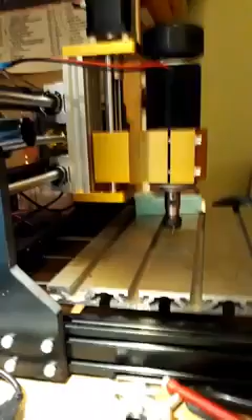Okay, let me see here. I'm trying, just a second. Okay, now, let me see here. Let me turn you guys around. Whoa, there we go. There we go. There we go. Let me see. I'm trying to get you guys in a good place where you can see what I am talking about. And okay, that should help.

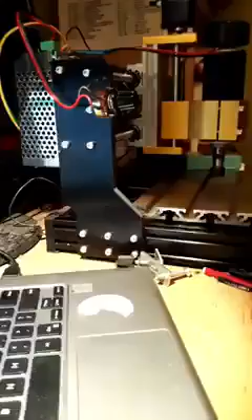Alright, this is an upgraded 3018, and I have just got it plugged in and working, except my Z-axis quit working. But I'm going to show you how to do some troubleshooting. Okay? First of all, the 3018. One thing people have to understand with the 3018: the 3018 is not, and I repeat, is not an industrial machine. In other words, this is a toy, hobby, home CNC machine.

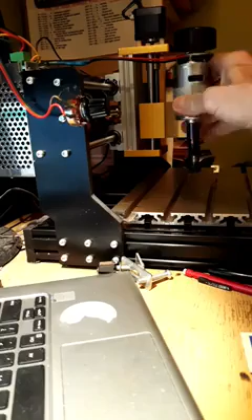Okay? With that being said, on the 3018 it is not recommended to run any tools larger than 1/8 inch. Now, why do they say that? Well, I'm going to tell you why, as you figured I would. You see that spindle motor there, right? Well, this here is your standard spindle motor. Okay? This little piece of crap costs $4 retail. There are no bearings in here. There are only bushings. Okay?

So, if you run a tool bigger than 1/8 inch, you are putting a heck of a lot of pressure on this stupid little motor. Okay? You will burn it out. You will burn the brass bushings right out of it. These motors, if you do not run them carefully, they will last you a month, basically. Okay? So, enough said about this little motor here.

What I highly suggest everybody does is take this motor and throw it in the garbage and get yourself the Genmitsu 775. It is a direct drop-in replacement. And what I highly recommend then is to get Mark's RPM control. Okay?

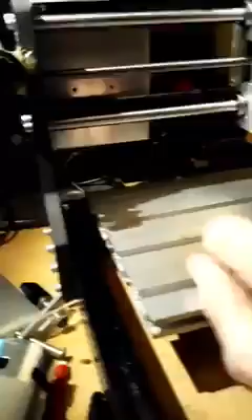Okay, let's get down to some terminology. First of all, because there's a lot of new people on here, very, very new people that just put their machines together last night, we are going to do this for them. First of all, you've got to know the name of the things on your machine. This is not called a thingamajig. This is not called a doohickey. This is not called a whatchamacallit. Everything on your machine has a specific name, and in my group, I require that people use the correct names of things.

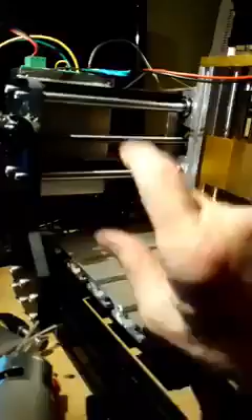First of all, these rods, these polished rods, they're 10 millimeter rods, and they are what your table slides on and what your X-axis slides on. Remember always, this is your Y-axis, this is your X-axis. They are always in that order: X, Y, and Z. Okay? X, Y, and Z. Now these are called ways. This is what the table rides on, slides on, and your X-axis slides on. They are called ways, W-A-Y-S.

Then you have your lead screw. Now your lead screw, obviously, is what moves your axis back and forth, okay?

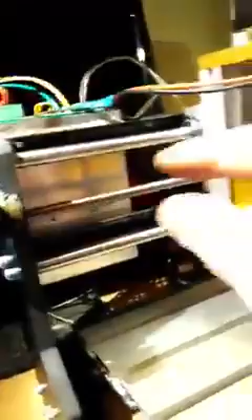Now, on the back here, you have a lead screw follower nut. It's spring loaded. When people ask me, what is that, why is it spring loaded with that second nut on there? That is what they call an anti-backlash nut. Now if you take a screw and you hold a big nut, and you hold that nut steady and you screw that screw, you're going to feel it going in. Then you stop and turn it backwards. You'll notice you'll be able to turn it backwards a little bit before it even catches. That is backlash. So we don't want that slop in this lead screw. That's why we use an anti-backlash nut back in here and underneath your table, in conjunction with your follower nut.

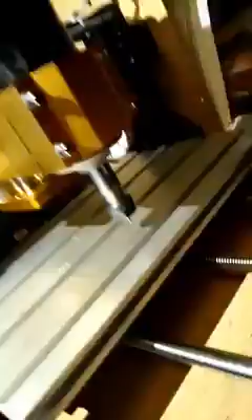These here are called collars. This is your collar between your lead screw and your stepper motor, and you have three of them. You'll have one on the back of your table back here, one right up in here, and one right there. One for each axis.

Now, one thing a lot of people don't realize is just the name of the machine itself. 3018 — where did they drop that thing out from outer space? Very simple, guess what? Because the capabilities of this machine, it can carve 30 centimeters by 18 centimeters. That's right, 30 centimeters here and 18 centimeters that way. So that's why it's called a 3018. People that have a 6550 laser machine, guess what? That machine can laser engrave 65 centimeters by 50 centimeters. So the name of the machine is the actual size of your carving area.

Okay, so I think we're done for tonight. Not really, not really. We haven't even started. I'm going to tell you a couple things that you have to beware of. And this is no joke at all. People that are watching here can verify this, and they will tell you in a heartbeat.

I'm going to do a little explaining about CNC and the stepper motors and such. Okay? First of all, what does CNC mean? CNC stands for Computer Numeric Control. In other words, that's all you're sending from your laptop. You're going to be sending G-code, which are just numbers, and it controls how everything moves. Okay?

Stepper motors. Stepper motors use a lot of power. Okay? A lot of amperage there. Now, these stepper motors move by just on-off pulses. The pulse, if you look at it on a screen, it'll look like this. Up, up, down, like that. Pulses. On-off pulses. With that being said, in the electronics world, you have something called induction.

In other words, very simply put, these wires that go to this stepper motor, you have really high amperage signals going through these wires, and they are going on and off, on and off, on and off. So, guess what? Those wires there are exactly like an antenna. They are just like an antenna.

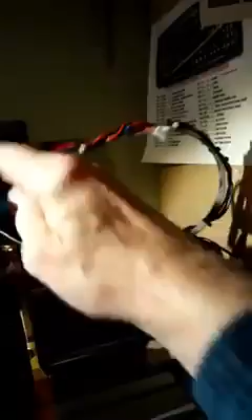And guess what? If your signal cable, the cable that goes from your computer over to your machine, is laying very close to stepper motor wires that are back there, and if you don't have your wires put up on a wire harness, they will get caught and you will tear them out and you will be in trouble. Be careful with your wires. I will show you how to make that.

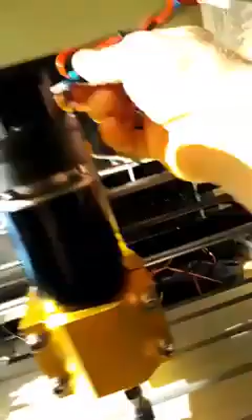It's really, really simple. I'm not even finished with mine because I have to reattach it here, I haven't gotten that far yet. But that's how it is when it's attached. Okay? Now, that keeps my wires away from everything else. They can't get hung up on anything. And the wires are away from my signal cable that is plugged in the board. Back here, the signal cable goes over to my computer, okay? It is totally away from those stepper motor wires.

Because if you don't do that, you'll be in the middle of a project, and I can guarantee you it will happen in the middle of a project. Not in the beginning. It'll either happen right towards the end or right in the middle. What happens is, as you're sending your G-code from your computer to your machine, that cable is laying next to stepper motor cables. And those stepper motor cables are just pushing out bad noise. It's called electrical noise.

And it's pushing it right into your signal cable, and that G-code that's going from your computer into your machine, guess what? It gets garbled, and all of a sudden your machine does not recognize it. It might move. It might jump from one letter and keep printing the letter a half an inch further away. You can get all kinds of weird problems. Or it just might lock up and say, sorry, we had a problem. Okay? That is a very well-known problem in this world.

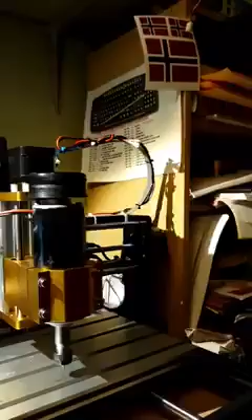And guess what? Those high frequency vibrations are exactly like an Allen wrench. They'll loosen up every screw you have in your machine. And if you think I'm joking, then just forget what I'm telling you. I have literally seen these machines fall apart. I mean, hanging. The whole thing had fallen apart. Because the person that put the machine together did not use, let me go get it here. This is where I just put all my stuff together.

And what I recommend people use when they are building their machines is, just a second, I'm trying to find, here we go. There we go. Sorry. This right here, Loctite. It is called blue. This is blue, not red. Blue Loctite. And this number right here, 243.

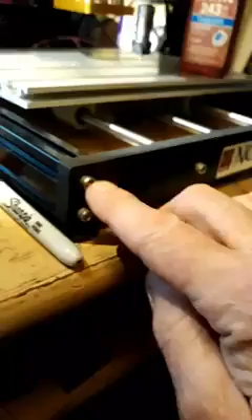If you use red Loctite on your screws, you will never get them out again. I'll repeat. If you use red Loctite on your screws, you will never get them out again. And if you have a problem with your machine and you need to take it apart, you are screwed. Okay? Blue 243 Loctite. And what you do is very simple. You start right here and you take this screw out. You put one drop of that blue Loctite on it.

You put it in and snug it up. Tighten it up. Don't over tighten it. You don't want to strip the threads. Just snug it up, just a little bit, just tight.

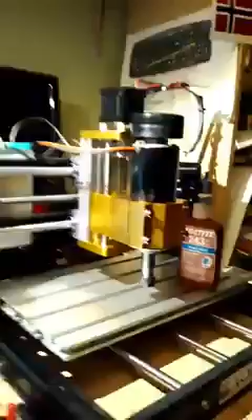When you're done with that one, you go to that one, and that one and that one. Every single screw. I'm talking every screw. Every screw that you can find on your machine, you need to put Loctite on. Okay? So that will keep your machine from falling apart.

Okay. Now, these machines are very, very simple. They're very, very simple. You have a controller board, and all that controller board does is control the hardware on this machine. And it's really simple hardware.

Basically, we have 3 stepper motors. One here, the X, you have Y in the back, and you have Z up here. That's all we have, 3 stepper motors. With that being said, there is no more movement. Your table moves forward and backwards, your X-axis moves left and right, and your Z-axis moves up and down.

So there is not much that you have to worry about with a machine, and troubleshooting is a breeze. The only thing you have to do, if you are going to troubleshoot something, is look at what the problem is and think logically. That's the whole trick right there. The whole trick is being able to think logically when you have a problem.

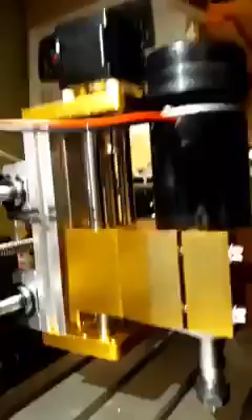That's your communications. And it's lighting up because it is getting 5 volts from the USB. Those 5 volts are what is lighting up the board right now. When I plug my power plug back in, there's going to be another light that comes on back there. So just because you see red lights back there does not mean that it's plugged in.

Now you don't have to unplug your signal cable if you're going to mess around with your machine electrically. So right now, I'm going to pull this connector out of my X-axis. I just pulled the connector out. This is what I just pulled out from the Z-axis. And I just go right in here and plug my Z-axis into my X.

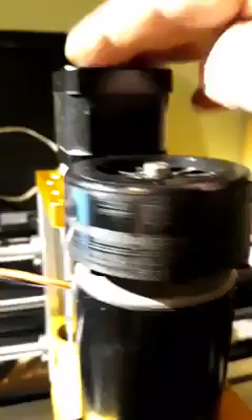Now watch this. I'm going to plug in my machine. Now, my Z-axis up and down should be controlling this X motor. So now I'm going to try to find out, is there a problem with my wiring, or is there a problem with my stepper motor? I have a feeling that it's a problem with the stepper motor, but I need to check my wiring.

So I unplugged the X. Here's the plug over here for the X-axis, and I plugged my Z-axis into it. Now, let's see if it moves. Nope. Right now, it is not moving my X-axis at all. I'm going to turn this plug around. Let's see. Then try it again. Oh, it tries to, but it's not working.

Okay, so now I have found out that there is a problem coming from my wire, from my board. So now I'm going to plug my X-axis back in. I just plugged that in and pushed my power in. Now let's try. Oh, it's moving. So there's nothing wrong with my X-axis.

Now my X-axis is back to normal. I got that wire in there. So this is my problem, and it looks like I might have a problem on the board itself. Okay? So this is exactly how you do troubleshooting.

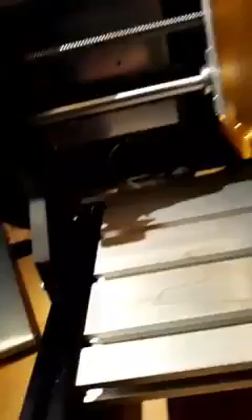Now I'm going to try one more here, and what I'm going to do is go back here and pull this wire off of my, and it won't reach. I was going to try my Y-axis on that stepper motor to see if it was working, but I can't. It's not long enough.

So I'm going to plug this all back in now, and I can move everything except my Z-axis. So I'm just going to try moving my X-axis now, and I'm going to move my Y-axis. Okay? See, everything's working fine. One thing you have to realize, any of these buttons, you have to realize one thing here.

These arrows mean move my spindle in this direction. Okay? If I click on this, it is going to move my spindle to the left. Okay? And that's what it's doing. Now, a lot of people think, oh, if I press this, the table is going to come forward. Wrong. You are not moving the table. You are moving your spindle.

So on this one here, you are telling it, I want to move my spindle forward, which, guess what? Moves the table backwards, okay? But you're bringing your spindle forward. That's what we wanted, right there. If I want to move my spindle towards the back, then I move it and the table comes forward. Okay? All magic.

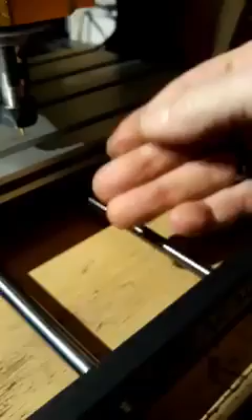Now, first of all, let me tell you a couple things here. Let me just move this back. Now, on your 3018, you see how clean this is? There's nothing on here, okay? That is because we do not put oil; the only thing that is recommended to put on this lead screw here is graphite. G-R-A-P-H-I-T-E. Graphite. It's a dry lubricant that you can put on here.

If you put oil on here, guess what happens when you're doing your carvings and all of that dust is falling right onto here and it sticks to the oil, and as it's going back and forth, your lead screw follower nut back in here will get caked up with sawdust. And guess what? It will get caked up like cement. And it will stop up and your machine will not run. Okay? And you will risk burning out your stepper motor or your board.

Do not put anything except graphite on this lead screw, or you are going to be asking for a lot of problems. Okay? And that's not cool at all. All right.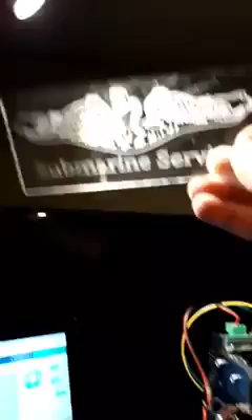And I mean, the things that you can carve with them, just like this here. Well, let me get a good picture of that. It's kind of hard to see. There we go. Put a little bit of light on it. This is done on plexiglass; actually, I just found it back on the floor, so it's all scraped up, but try to get it in focus. There we go. So you can do really cool carvings with the engraving tool.

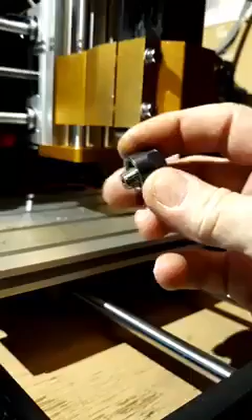Okay? And I'm going to talk a little bit about collets. If you've never used collets before, well, guess what? You've got to learn how those work too. When you take your collet, your nut, out of that machine, okay? You see this is your collet here. And you only get one with your machine. Okay? You only get one. And it's 1/8 inch, or 3.175 millimeters, which is the same thing.

Okay? Now these collets, if you take yours out and you tip it upside down like this, and if it falls out, you have been doing it wrong. Okay? These should not fall out. Now, I have to put you back up here. Just hold on for 1 second.

Okay, now I'm gonna show you these collets. When you're gonna take the collet out of the collet holder, what you have to do is you have to cock it. So you have to keep turning it, and you'll feel there, right there. It just clicked, and it is completely cocked.

Okay? Then, what I take, anything, a little piece of wood, but let me just give you some light on this. Okay, you see how it's cocked right there? And all I do is take a piece of wood or pencil or whatever, and I push. And there we go. It just came out.

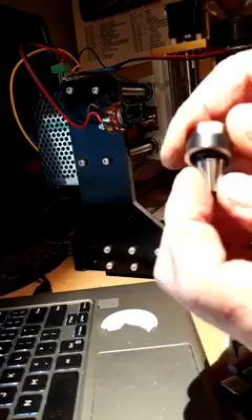Now you see this ridge here, inside of here, there is a ridge in there. And that's why when you put a collet inside the holder, what you do is you press it, you just press it until it clicks. And then you hold it upside down and if it doesn't fall out, it's correct.

Now, I'm going to talk a little bit about collets. A collet, you see all these grooves? You know what these grooves are for? It's because this here is tapered. This is tapered. And the inside of the shaft on the motor is also tapered.

So as that nut pushes that collet up, okay, that nut will push that collet up, and what it does is it closes. It closes all of these veins. It tightens up around the tool. All right, supposedly, okay?

Now, if you do a carving and you're going to change tool, let's say you're going to use a 2-tool project with a roughing tool, and you're going to use a 1/8 inch tool, and you're going to hog out all that wood. Then you're going to put a detail tool in there. Whenever you change tools on your machine, take your collet out and clean it.

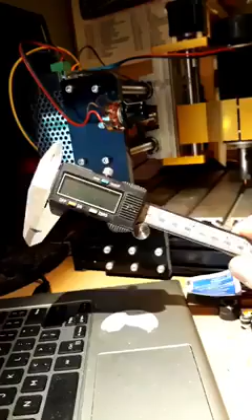Now, I tell everybody in my group, every number that you put in Easel should be 100% correct and dead on. If it is 3.1 millimeters, then that's exactly what you should put in. And with that being said, you cannot own a CNC machine without owning a set of calipers. These calipers are every CNC operator's best friend, because everything you want to do, you want it to be 100% accurate.

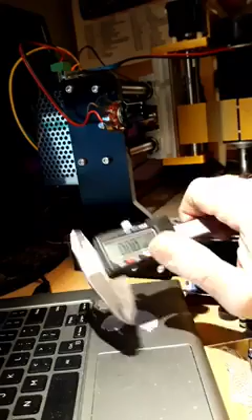Okay? And what I mean by that is I want you to measure exactly everything you do on your machine. Okay? And my batteries are getting low, I can see. So, use a set of calipers.

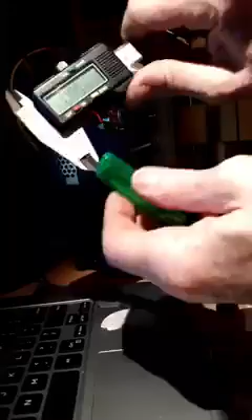Now I'm going to show you real quick. Calipers, this here is for outside measurements. I want to see the size of this lighter, I can measure it like this. Now, if somebody was to say, well, Paul, how big is that hole right there? In this game here, we do not eyeball anything. You don't go like this and eyeball it. No. You use the inside. You see that there? This is for inside measurements.

So what I do there, watch this. I put my calipers in there and I pull them out and I can say right there, it is 19 millimeters. Exactly a 19 millimeter hole right there. That is your inside.

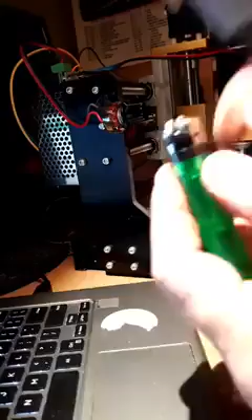Then if somebody was to say, well, how deep is this? If I put this on the table, how high is it from here to the table? What's the height of this? Well, if I just do this, oh, let me just hold on to this for a second till I get it.

There. That is your depth gauge. Your depth gauge, and that is 31.5 millimeters. So you just put the edge on here like this and you push down. There we go. Just like that. 31.5 millimeters. Okay? So now you know how to use calipers.

If you are going to own a 3018 or a CNC machine, excuse me, you need a set of calipers, because everything you're going to do needs to be 100% dead on. And I'm going to tell you a little secret. If you are 100% dead on with every measurement you do on your machine, guess what? You are going to eliminate 50% of the faults. Right there. Just boom. Just by doing that.

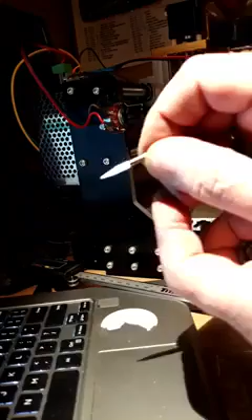Okay, this is an engraving tool. I'm sure you recognize this one here with the little blue hat, the rubber cap on it. From here to here is your cutting tool. From here back, this is the shank. Okay? This is the shank. Now, whenever they ask for a tool size, the machine could care less about the shank. They are not asking you the shank size. In Easel, when you're going to put the tool size in, it is not the shank. It is the actual cutting tool size.

So, for example, here, the smallest I have here is 0.8 millimeters, 1 millimeter, 1.5, and it goes up, and I got up to 1/8 of an inch, 3.175. Guess what? All the shanks are 1/8 inch. But when you are going to put a number in your machine, it wants to know the exact diameter of your cutting tool. And when you are going to measure a cutting tool, just to verify, and I highly suggest that you do that too, double check everything.

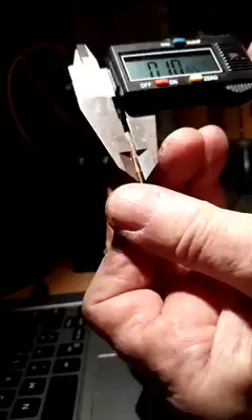Okay, now I'm just going to measure it, and I just slide the cutting part of the tool. You see, I'm not getting any of the shank, nothing else except that tool, and this is 0.82. Okay? But you can measure it several times, and depending on how you turn it, little by little, there's some edges that are higher than others. Okay, so you see how my numbers are changing, but it's roughly 0.84, but we call this a 0.8.

And if you feel it, it has kind of like rough edges, not just the flutes. Now, what's a flute? Since we are talking about tools. There we go. Just one second. Let me get my tools out of here so I can show you. Okay, I have an up cut here, and I have a down cut, and I have a ball nose here. I'm going to pull them out to show you so that you will understand what the different tools do.

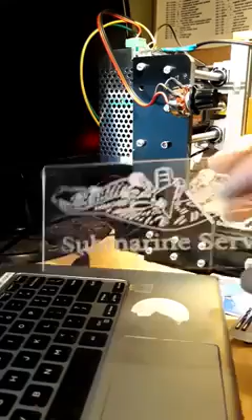When you go real deep, for example, I'm going to use these letters as an example. If you go real deep on a carve, that little part of the A might break out on you. Or that in the middle of the B might break. Or up in here, the S, that part there will break off on you. And it looks like garbage. That's because you went too deep and there's nothing there, like that E that would crack right off and be gone. Do not carve deeper than 2 millimeters unless there is a specific purpose for it.

Okay? I'm going to show you people, my members have seen all this before, but this is just a show. Guess what? Those there are inlays. These are inlays. This is pine, and this here's cedar wood.

What I did was I cut out these pockets, and then I went right back and took this off my machine. I put the cedar wood on. It was 2.5 millimeters thick cedar. And I cut my letters out. And guess what? They popped right into the pocket.

And this, like I told you, shows how accurate this machine is. Look at these inlays. There is absolutely no air between the cedar wood and the pine. There's absolutely no air. Okay?

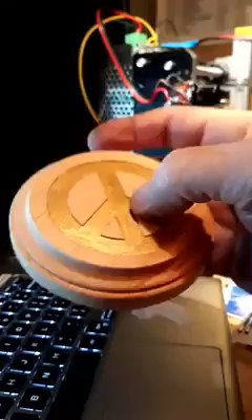Now you see here. This was just carved out, just for the heck of it, on a coaster. And this is 2 millimeters deep. And you see, it's actually too deep. It is too deep. So, keep it shallow. And the cool thing, get this.

If you go too deep to begin with, you're screwed because you can't put wood back again. If you go too shallow, guess what? You can just run it over again, put a deeper depth on it, and run it again. You still have material there. Okay? But if you go too deep to begin with, then you're screwed.

I'm going to turn you back over here just a little bit because I want to show you some tools. Now, you hear the term upcut, downcut. Well, this tool, I'm going to be turning it clockwise, the way it's supposed to. When you're looking down on top of your spindle, it should be turning clockwise. Now watch this tool as I turn it clockwise. Look what the flutes do. You see how they're going upwards?

Okay, and they're lifting the dust and what's been cut out of the hole. But guess what? At the same time, it also lifts up the edges of the wood. Okay? Just keep that in mind, because during this marathon I'll be talking about all of this.

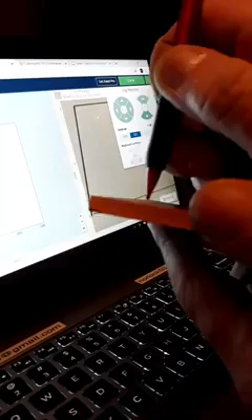Now, the reason we use these is when you are creeping up on your 0 point. You want your tool to come down exactly right on the top of your wood, without going into the wood and not being over. If you are 1 millimeter over, your whole project is going to be 1 millimeter off. That's why I say everything you do with these machines should be exact. Because when you do everything exact, your project is going to come out exactly beautiful.

So when I'm touching off on my 0 point, I go all the way down to 1/100th, and I use a piece of paper, sliding it back and forth the whole time as I'm bringing it down until that paper stops. Then I just leave it there, I don't even lift the tool up. Because when you hit carve, eventually it's going to lift the tool up, and when it does, you take your piece of paper out. You don't have to go and try to pull it out, just leave it.

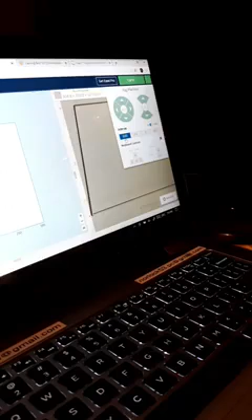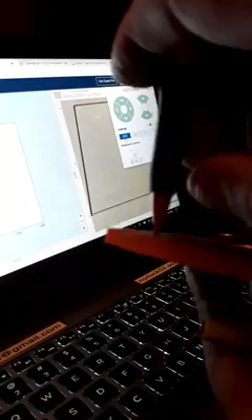0 point is very, very important. Because when you set your 0 point, you are telling your machine, right here is my X0, my Y0, and my Z0, which Z0 is the top of your wood. By telling your machine, listen, I have my tool resting exactly on the top of that piece of wood, what you're telling your machine is, this is the length of my tool now. Now you know the length of my tool, and you know that it is at Z0, so everything is reset to Z0.

So Z0 has to be perfect. Not 0.5 millimeter over, and not pushed down into the wood. Because it's real easy with those engraving tools, let me tell you, it is very, very easy. Wait a minute, I'm just going to get it out here for you.

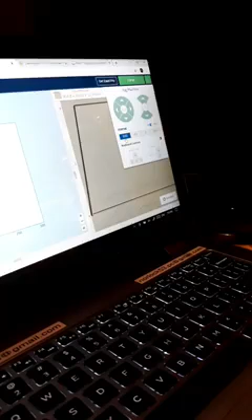Now, I'm going to tell you a little secret. With these engraving tools, you have to use that paper, and you have to creep up. That's why I go down all the way to 1/100th of a millimeter and just keep hitting until this just grabs the paper. Because if not, you will drive that little tip right into the wood, just like that.

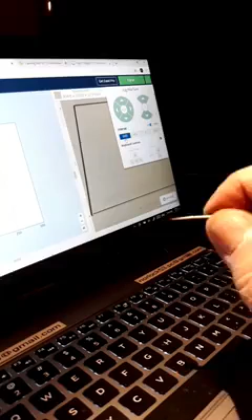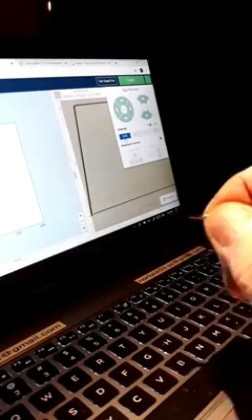And the reason I'm saying this, for example, I have been in a situation. Now, these tools here are garbage. The ones you got with your machines, the Chinese are not going to send you any expensive tools, I'll guarantee you that right now. The Chinese are the cheapest penny pinchers there is. So these tools here, they cost roughly $1 each.

These are garbage, but they're very okay for you to learn to use your machine with. Just like these tools here, these are $1 each, $1 a tool. They are garbage, but they work, and they're okay to learn with. I mean, if you use one for a project, it will probably be wore out.

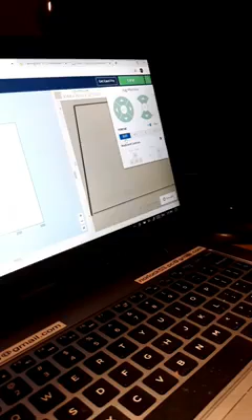And since I'm on that subject there, never be a hoarder of old tools. Okay? Never be a hoarder of old tools. Because, and I'm telling you this because of experience, okay? I'm a hoarder. I am a hoarder. I hoard everything, anything.

Now I'm getting it from the peanut gallery over there. I hear a yup. But yeah.

What I was getting at was, if you hoard old tools, you're going to end up putting an old worn out tool in with your good tools, and then one day when you are going to use a $25 piece of wood and you're going to carve something really nice on it, you put that tool in thinking that it's a brand new tool, and you make that carving on your $25 piece of wood, and it looks like garbage. Guess why?

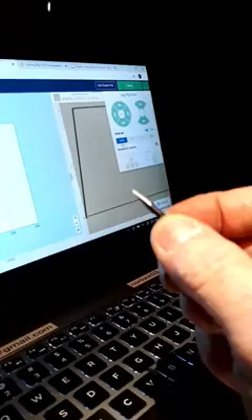So, back to tools. I don't recommend you buy high-dollar tools when you are learning to use your machine. No high-dollar tools, unless you got a lot of money to spare. Okay? And these tools here, tool size for this, 0.1 millimeters. And this should never be used deeper than 2 millimeters. Best at 1 millimeter, or on plexiglass or acrylic, 0.5 millimeters. That's where you get the best carvings. Okay?

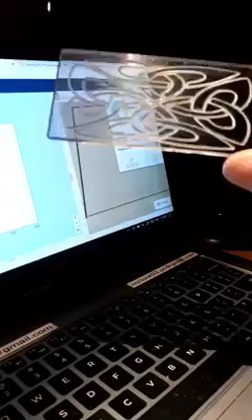Here's another one that I did, which is just one of the icons in the drawing area. Okay, now this is 0.5 millimeters deep, and it's actually more than enough. Okay, and when you put light to it, let me see if I can show it to you down here. Yeah. Now I'm putting light to the edge of it, so it really makes it pop. I'm trying to get it. You see there, when I put my light to it right there?

I mean, it really... And you can get these really cool bases. They got these really cool bases you can buy online, and they have LEDs in them. I'm sure you people have seen the post in the group, the acrylic with flames, very, very cool. And that base that lights it up, you can buy them online. Okay.

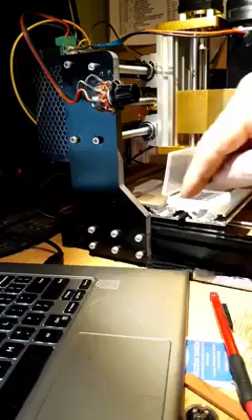What else we got here that I can talk about? We talked about machine. We talked about maintenance, troubleshooting. Okay, now a little bit about troubleshooting. Actually, this is kind of interesting. Let's say you're doing a carving, and on your carving, you notice the lines that are going this way. Your spindle is going to be moving in the X axis, going back and forth, left and right.

But if you see that your line is not perfectly straight, that it's kind of wavy, or there's something wrong, well, then you probably have a Y-axis problem. Okay? Because that Y-axis is the only thing that's going to give you variations as you're moving along. This here is on rails, so it's going to go exactly straight. But if your Y-axis is screwing up, it's going to give you wrong indications this way.

If your X-axis is wrong, it will give you variations this way. Okay? Because the table moves exactly forward and exactly backwards, but if this is off, it will give you a wavy line in your Y-axis. And if your Y is off, it will give you a fault going in X-axis. Okay? And so, for example, if you find out, I think I have a problem with my Y-axis going back and forth. It's not going smoothly or something.

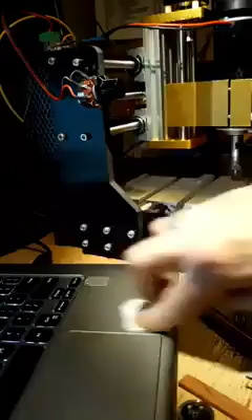Now, one thing you do have to understand is that on your 3018, the 0 point is what we call a floating 0 point. In other words, wherever I move my machine to, if I move it right here, and I bring my z-axis down, which I can't because I gotta fix it, but anyways, wherever I put my 0 point down on my material, then that's going to be my 0 point. I can have my 0 point any place I want on my machine. You determine where your 0 point is by putting your tool down.

And since I am at it, I'm going to talk about clamps, these that you got with your machine. Now mine are modified a little bit. I put these knobs on, which make it easier, and I've made a little plastic. I just use plexiglass, and watch this. These clamps slide exactly right in there. Let me move this out just a little bit. Okay.

All right, now I'm going to show you guys some stuff here. And I just got to find what I'm going to tell you here. And I am going to show you the correct way of how a clamp should be used, because a lot of people screw this up. Now, let me get as much light as I can over here. Let me bring it forward a little bit more. All right.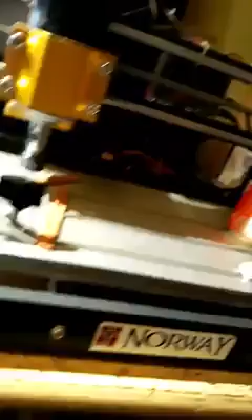Because if your waste board is bigger, like that big, you can't even get your darn clamps up there, okay? You see what I mean? So you're going to have to find a piece of wood that's basically the same size as your piece of wood. Or why don't you just do it the simple way? Just forget the stupid waste board. Like I said, waste boards are a waste of my time. All you take is one piece of wood.

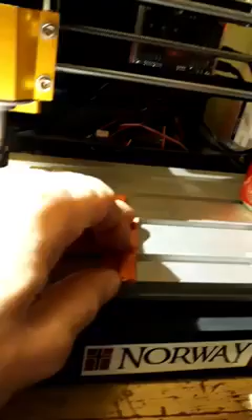From one piece of wood, you cut yourself some strips that you know are exactly the same height, okay? These here, I can run my finger over, and I cannot even feel that there is a ridge, okay? These are exactly the same height. Watch this. Watch this. Ooh. Now this is what I call AFM. Huh? How much simpler can it get?

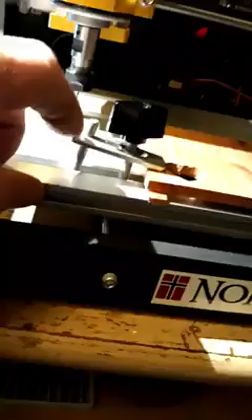Now, I'm gonna adjust my clamp. This is your jack screw. It's the one that goes in the threads, okay? And this is the one that is used to adjust up and down on the back of your clamp. So, whenever you are going to use one of these clamps, your clamp should be completely parallel with your piece of work.

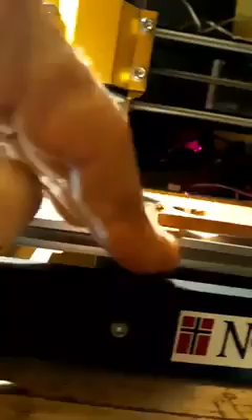And look at this. Just clamp a little bit, and it is completely parallel with my piece of work. It's not like this. If it's like this, you're going to be pushing your work away. If it's like this, you're going to be making an indentation in your piece of wood. And look at this. This is my whole wasteboard right here. That's my whole wasteboard. Huh? Now, wasn't that a lot simpler than trying to find a piece of wood?

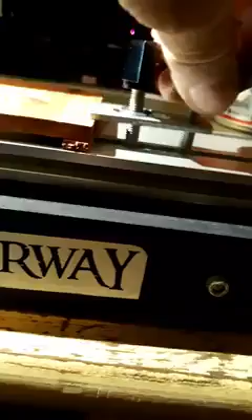Let me just adjust these here a little bit. Just a second. Okay, now here I just bring it up to here. Move this a little bit forward so I can get down to here. And I bring that down by screwing that screw there. And I tighten it up. And with those plastic things at the bottom, I can do it all with one hand, right there.

Boom, boom, boom. My material is off the table, so now I can cut anything I want out, because your tool is only going to go right to the bottom of the wood, okay? And that's all you got to do, is use two little pieces of wood instead of trying to find some stupid wasteboard, okay?

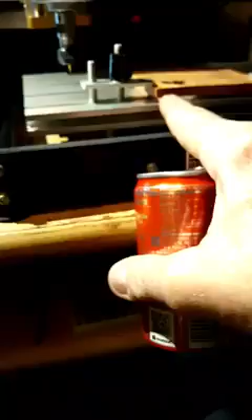Wasteboards are a waste of money and a waste of time. Make yourself some standoffs. I'm going to show you what we use in the real CNC world on big CNC machines for standoffs. Right there, we use 1-2-3 blocks. This is 1 inch by 2 inches by 3 inches. So it's 1 by 2 by 3. And this is what we use on CNC machines. We will put our piece up on there and we will clamp it down, or we will put it like that and we will clamp it down.

Now, believe it or not, on a 20-foot CNC machine, if I am going to do a job on a CNC machine, even a 20-foot one, I will run my hand over the table. If I feel one tiny mar where maybe the tool has hit it or somebody dropped something on the table and made a little mar, guess what? I will be sitting there with a sharpening stone on that table like this, getting rid of every mar on that table, because every mar is inaccuracy. Okay? So, I've just been covering the 3018 tonight.

Tomorrow night, we're going to get into the cool stuff, and we are going to get into Easel. Let me see. I'm just going to look here real quick. I'm just looking at the questions.

Oh, okay, Matt Lowe. You like my spindle? Me too, buddy. Me too. Believe it or not, when these machines first came out, this spindle motor, wait a minute, I'll turn you around here. This spindle motor is 55 millimeters, okay? The little one is 45 millimeters. So, we actually started out making our own brackets, and these are, let me show you. Let me show you.

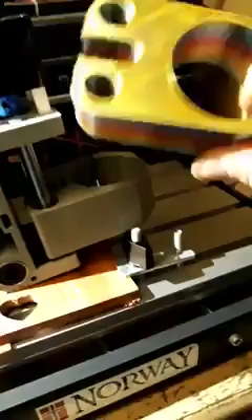Where has my Z-axis gone? Where can it be? Oh, here it is, right in front of me. Okay, here's a Z-axis, okay? And what we literally did was replaced this bracket with a 3D printed bracket. I got a 3D printer here. So I printed this bracket, and that's the way we did it back then. You would have to take this whole Z-axis apart.

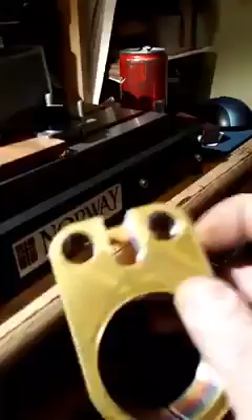You take this off, you take these bearings, you have to manually use a, what do you call it? Not a burnishing tool. I got a brain fart. I can't remember what that, reamer. A reamer. Because these holes have to be reamed out to exactly 15 millimeters. Actually, you ream it out to 14.95, because when you press the bearings in here, then you want it to stay in there. Anyways, this was the old days. This is how we did the upgrade back then.

The 3018 is only maybe 2 years old since it was introduced to the market. It's not very old at all. But now they're coming out with really, really cool upgrades. And this one here, this is the baddest, because this motor here is a 500 watt motor, 12,000 RPM, and it's a beast. And it will tear up some wood, let me tell you. So you can increase your feed rates with that, but you just don't want to go nuts. Your machine is still a 3018.

That's like they say, you can have a Volkswagen, and you can put a Porsche engine in it. Okay? You can put a Porsche engine in a Volkswagen. But guess what? You don't have a Porsche, you still have a Volkswagen. And you have to take care of it thereafter. You can't expect a Volkswagen to handle on the road like a Porsche would. Okay? Now let me just read some more of these here.